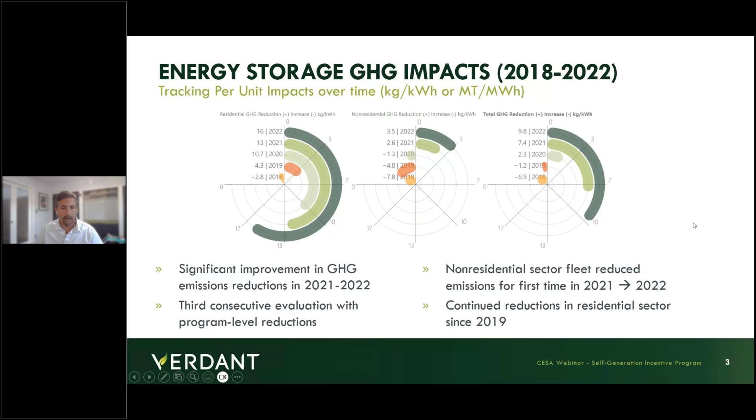I want to highlight this because of the timeline of the SGIP. It was developed and created in 2001 in response to the energy crises in California. Initially, as the name suggests, it was a self-generation program—incentives for behind-the-meter, early rooftop solar in California, fuel cells, wind turbines, IC engines. It wasn't until about a decade later that behind-the-meter energy storage became eligible as a technology.

The big important transition in the program was California Senate Bill 412, which modified the primary purpose of the SGIP from peak load reduction to GHG emission reductions. The program has seen many iterations since then—a decade of changing and refunding—where the budget went largely to storage, with incentive levels differing based on different budget categories.

Based on the evaluation results, energy storage was shown to be increasing emissions in the evaluation years 2017 and 2018. A GHG working group was established, and among other things, they created a digital GHG signal to give developers and manufacturers a better granular understanding of grid conditions, to see if batteries could be utilized more effectively to reduce GHG. There was also decision language that included compliance and operational requirements addressing GHG impacts. And here we are today.

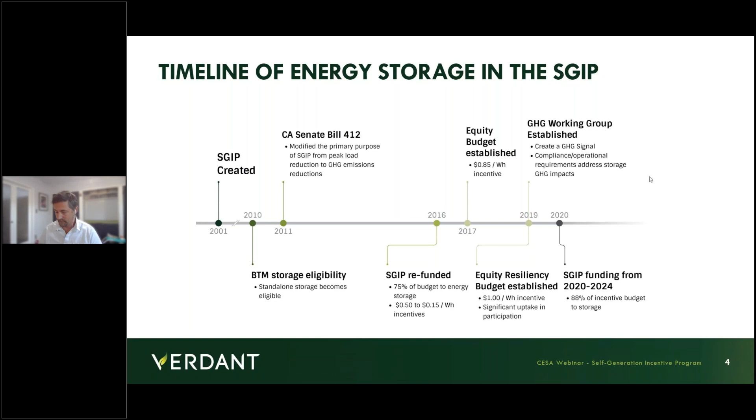Just to frame the scale of the program: as of the end of 2022, when that most recent evaluation was published, the SGIP was composed of about 37,000 systems paid over time, from the first system paid its incentive in 2012 through the end of 2022, representing about 1,300 megawatt hours of capacity.

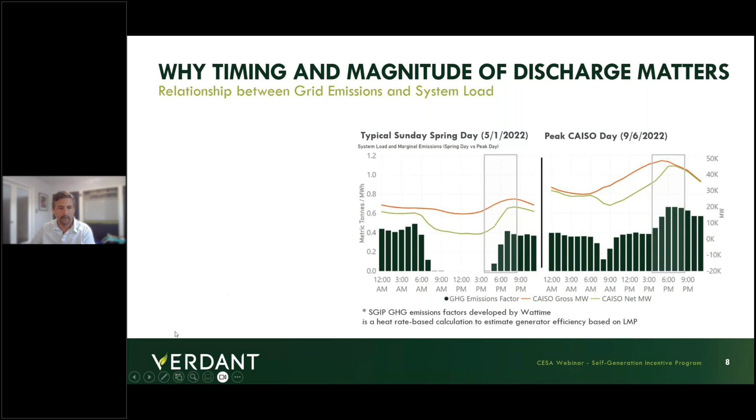Just a quick brief discussion about evaluation approaches. There's a lot of metrics that we develop that are very specific to the battery telemetry.

Efficiencies and utilization: you can sum the total discharge of a system over a given period of time, divided by the total charge of the system, discharge over charge, and get a round-trip efficiency of a system, similarly with cycles and capacity factors.

There are some metrics that we develop that are based on consumption at the meter in the absence of the SGIP technology. So we're utilizing AMI data from a customer prior to the installation of the energy storage system, looking at an unobservable counterfactual to measure the impact of the program intervention.

That graph on the right depicts what we do: the black line represents the metered load that the utility would see, delivered and received load, and then we back out the impact of the storage system to show what that load would have looked like in the absence of the storage. From a GHG perspective, systems could provide emission reductions relative to that counterfactual if emissions avoided during discharge are greater than emission increases during charging.

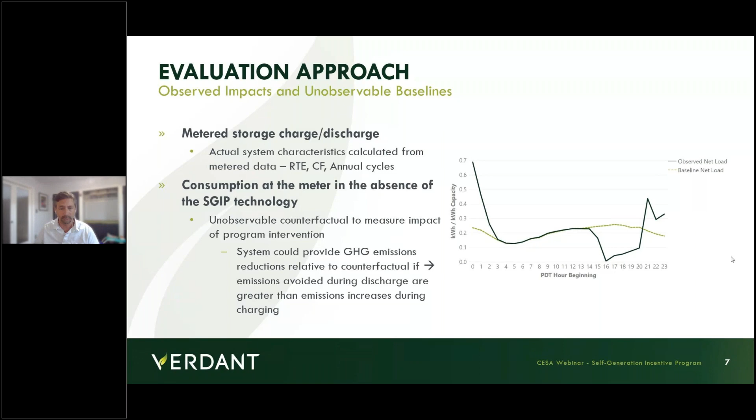This takes out the storage and looks at what's going on at the grid scale. Here we have two typical days: a Sunday spring day in 2022, and the peak CAISO day, the peak system load, on September 6th of 2022, on the right.

You see a couple things here. I'm showing the shape of the CAISO load, both the gross load, and then the green line is the CAISO net load, which is the load minus contributions from renewables on both of those days. You see that there's greater magnitude of system load on peak days.

You also see during some of those spring days where there's ample grid scale bulk PV generating, some of those high intensive demands like AC are not being utilized like they are in summertime from behind-the-meter end use customers.

You see periods where marginal emissions, these black bars, are zero, meaning that the marginal generator unit is a grid scale PV. On the peak day, you don't see the same thing.

Marginal emissions never go to zero, but they certainly are lower in the morning before the ramp during the afternoon and early evening. I've also boxed off the 4 to 9 on-peak period, which is the on-peak period here in California, to highlight what's going on the grid in terms of the maximum megawatts of generation relative to the marginal emissions of those generators.

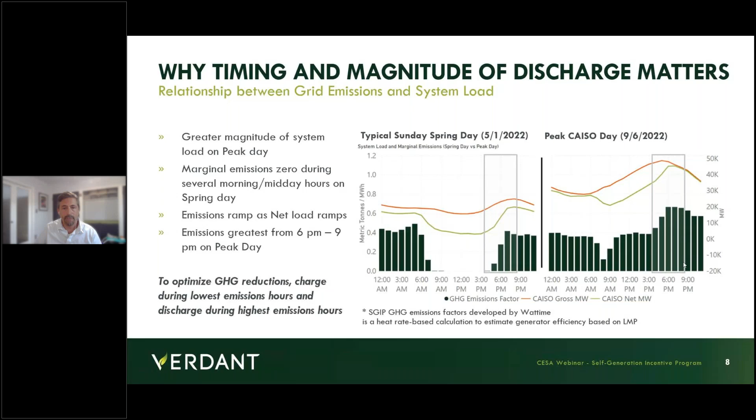Just a quick note on the characteristics. I have an appendix here also with the non-res storage dispatch behavior, but in the program of 37,000 systems, 97% of the residential storage fleet is paired with solar PV, with 3% standalone systems.

Almost invariably, residential storage systems are charging from early morning on-site PV. They're discharging in 4 different categories: self-consumption, which is charging from solar and then discharging the battery to zero out imported load throughout the day.

Time use arbitrage without export is very similar to self-consumption, except that zeroing out imported load is really just dedicated to the on-peak period. So if the customer has a 4 to 9 on-peak in their bill, the battery is just discharging exclusively during that 4 to 9 period and remaining idle thereafter.

We see time use arbitrage with export. Some systems are doing this regularly, discharging 40, 50 or 60% of the battery during strategic peak hours. And then some systems that are doing arbitrage without export normally, but discharging to export during specific events.

Demand response events, particularly like the Emergency Load Reduction Program, ELRP, or programs like that. And then we have a very small cohort of underutilized or backup systems. These are not allowed in the SGIP. Utilization is an important metric and requirement for the program, but we do see it every so often, and I'll get into what the impacts of that are.

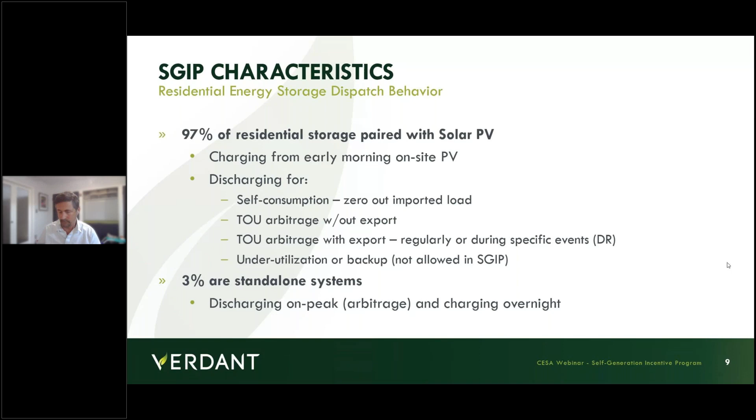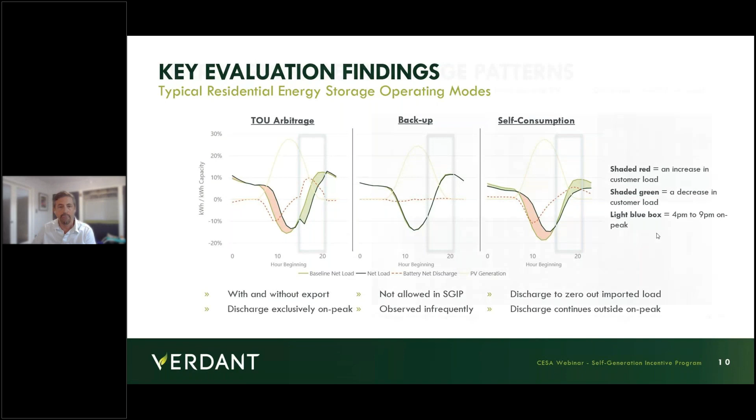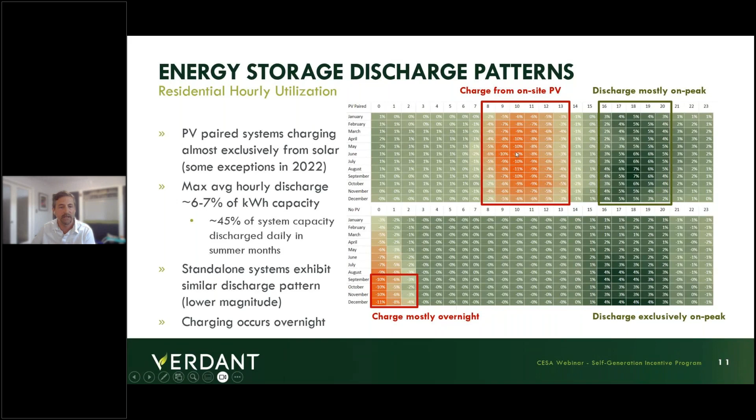You can see right away with arbitrage that there is more grid scale bulk PV generation during the day, obviously when the sun is plentiful. The same is true for rooftop solar behind the meter. So batteries are charging during PV generating hours, coincident with grid scale PV generating, where there's lower marginal emissions. Then during the evening, during that on-peak time, batteries are discharging, which is coincident with higher GHG as PV—grid scale PV—wanes and more traditional fossil fuel burning generators come online.

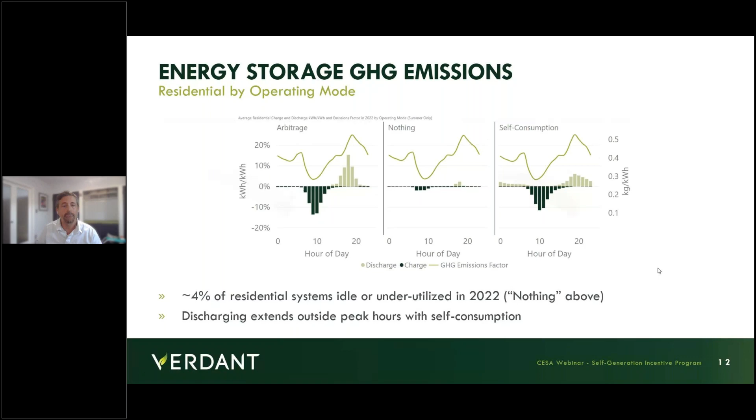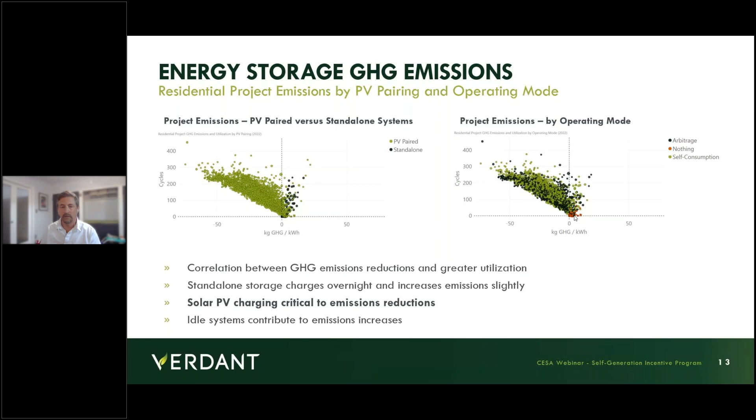Over here on the right are those different use cases: arbitrage versus nothing versus self-consumption. You see that arbitrage and self-consumption both lead to reductions in greenhouse gas emissions, while nothing—basically a battery idle—is contributing very slightly to GHG emission increases, because the battery is idle, it's got parasitic loads, and if it's being underutilized, there's also energy losses from the AC/DC power conversion.

Now, taking a step back—it looks like the program is doing a good job of reducing emissions, but is there any value being left on the table currently? So what we want to do is compare actual dispatch to optimal dispatch using the WattTime GHG emission signal. And optimal dispatch suggests that yes, there is more value that can be extracted from these systems.

We found an average of about 17 kilograms per kWh capacity of observed GHG reduction in 2022. That was an average across the whole residential fleet. When we had batteries follow the GHG marginal emission signal, we found a 3x improvement in GHG emissions when you optimize for it.

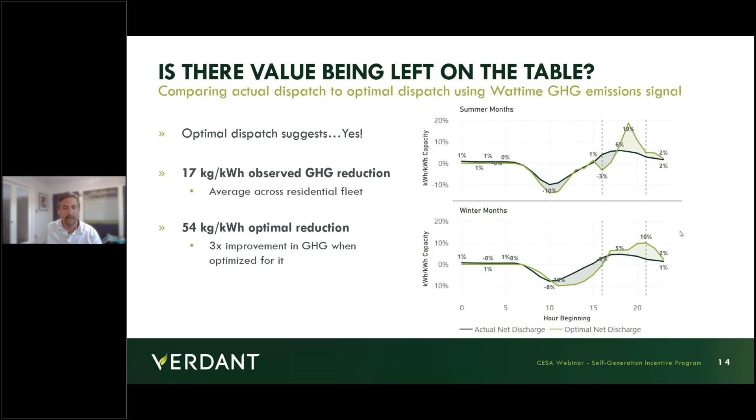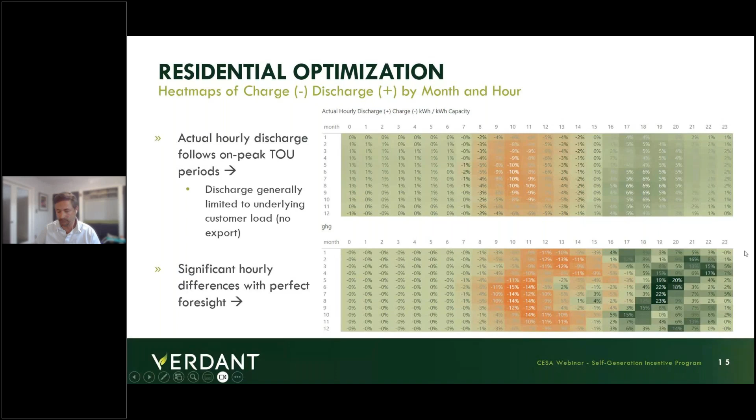So in conclusion, SGIP behind-the-meter energy storage technologies are providing GHG emission reductions. There's a lot of reasons for that. Minimum cycling requirements are great. One of the program requirements to sort of have minimal utilization is certainly driving that. Higher differential: the SGIP requires customers to be on higher differential on-peak, off-peak time-of-use rates. That helps guide some of the behavior. And number 3, which is the battery operating mode.

So someone who's doing time-of-use arbitrage, the return on investment, the payback period, all become much more attractive when you're looking at a higher price differential time-of-use rate. And I will note here too, this is 2022, so these are all NEM customers, net energy metering. There's no net billing tariff customers in this cohort or in the program at this time. And also demand response participation certainly helps with GHG emission reductions during some of those really critical emergency hours. And then access to that digital GHG signal is guiding that behavior.

However, residential and non-res systems are not discharging the total capacity of the system regularly. Many res customers are limiting their discharge just to maintain that net zero load rather than exporting. So some program improvements to encourage additional battery utilization include increasing cycling minimums to better capture actual behavior, enrollment in virtual power plants where an aggregator can control a fleet of systems, or utility-controlled storage. We see models of that here in the States that have success. Participation in real-time rates, where there's more granular rates than just the 4 to 9 on-peak period.

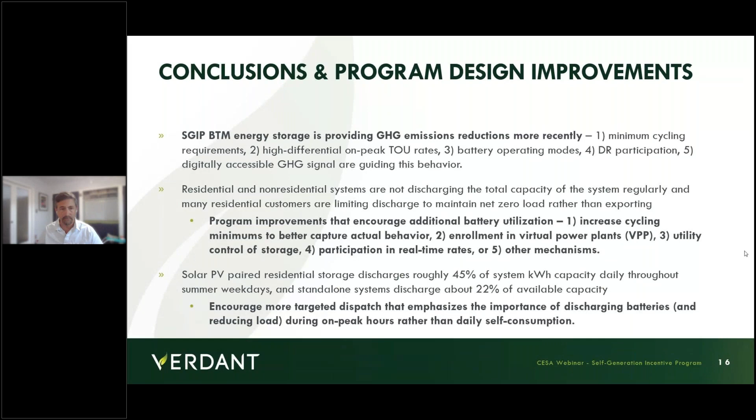And then behind-the-meter storage paired with on-site PV. Obviously, when you're charging from early on-site PV generation, that's clean electrons being discharged. And if you're exporting to the grid, those are clean electrons, clean energy being exported. And charging also occurs coincident to those lower grid-scale emission hours. So when you're charging the battery, that's when the grid would rather you absorb some of that load rather than exporting or discharging.

And then GHG emission differentials between charging overnight and discharging on peak are not sufficient, particularly in the summertime, to realize emission reductions for standalone systems like we see observed with PV-paired systems charging from on-site PV. So standalone systems perhaps could achieve reductions with the appropriate signal, perhaps the GHG signal or some kind of real-time pricing signal.

And then finally, the optimization modeling reveals that average actual avoided emissions of 17 kilograms of GHG per kilowatt hour of capacity would triple if you can optimize for reduction. So, creating more ambitious GHG reduction targets, having more granular signals that developers, manufacturers, host customers, utilities and aggregators can get their hands on to extract more value from these DERs would certainly be beneficial moving forward. And with that, I will hand it back over to the panel.

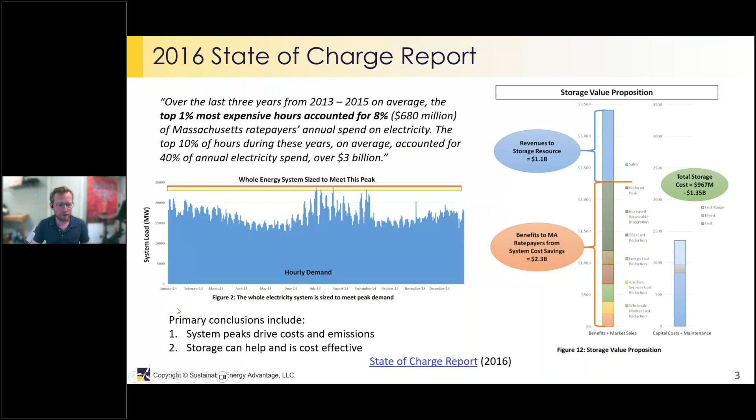Let's see if I can get to the next slide here. Yes. You saw that reflected in the statute that followed. So 2018, the enabling legislation passes. The statute itself is very thin. It doesn't specify whether emissions are the goal or whether peak load reduction is the goal. But in the announcements, in the discussion, there is very much an emphasis on getting storage developed, reducing peak demands, and emissions are sort of also in there. The policy goes into effect in 2020.

And if we look at it from DOER's perspective, based on the straw proposal that they released when they were developing the regulations, there were an array of different goals for this policy: flatten the net electric load curve, reduce system costs, encourage storage deployment, and yes, of course, also reduce emissions. All of these things we will all understand are very much related, but if you were to design a policy for instance just reducing system costs versus just reducing emissions, you would end up with different policies.

So what is CPS? It is like a renewable portfolio standard in that it is a market-based, certificate-based policy that places an obligation on load-serving entities to procure a certain number of certificates. But that is where many of the similarities end. There are a lot of other complications, interesting things that make it CPS and not just your typical RPS.

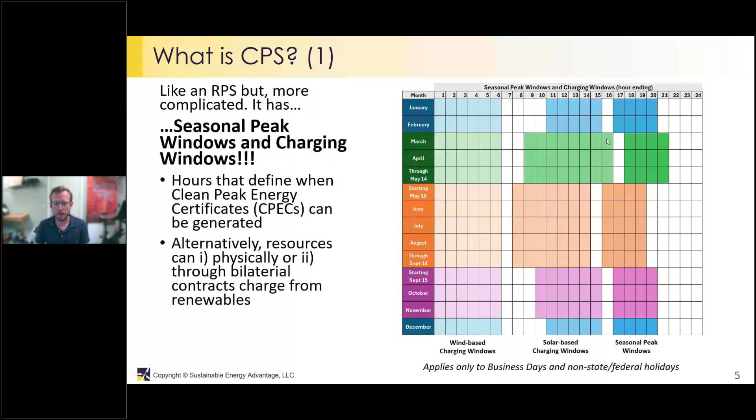Other components of the policy I'm going to go through more quickly. CPS has multipliers. The thing that I want to highlight here is that you can generate more certificates during the summer and the winter, 4 times more certificates specifically, because those are when ISO New England tends to have the highest peaks. It is not necessarily when there's the greatest emissions reduction potential.

Similarly, there's an additional multiplier associated with output, discharge, or load curtailment, depending on what type of resource you are, during the monthly peak hour. You can generate 25 times as many certificates during that monthly peak hour. That peak hour and that magnitude of benefit is very clearly targeted at cost reductions, because that can produce cost reductions from a capacity perspective, and also from the way that transmission costs in New England are allocated. By reducing load during those hours, there are opportunities to impact those system costs.

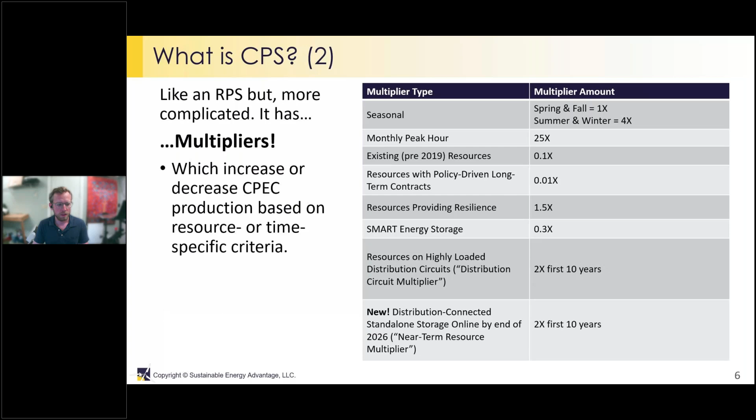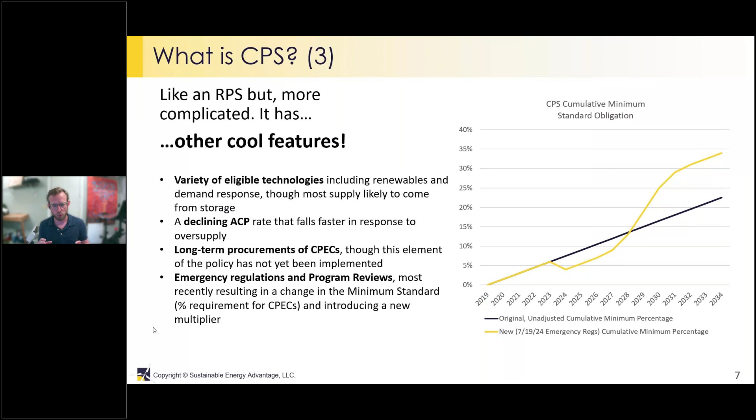There are a number of other critical elements of the policy that I'm not going to talk about, except to mention briefly that CPS is also different from SMART in that it has a different set of eligible resources. In addition to behind-the-meter storage, front-of-the-meter storage, both distribution and transmission connected, is eligible. Load curtailment, demand response, EV demand response, all sorts of technologies, and also certain renewables are all eligible, which again make the policy dynamic, interesting, complicated. But for today, I'm going to focus on the emissions impact specifically of storage participating in the policy.

This is going to change a little bit based on emergency regulations that were promulgated about a week and a half ago at this point, which reduced the demand to try to allow supply and demand to reach balance a little bit more quickly. But for now, certainly the market is very undersupplied.

So the question, is CPS reducing emissions? The short answer is probably not much yet. In answering this question, I'm going to reference a couple of studies that have been performed on the topic. I'm going to show a little bit of original analysis a little bit later on, but we don't have access to the same amount of data, the same type of data that Verdant does. So a lot of this is going to be based on modeled likely behavior of storage and not necessarily observed

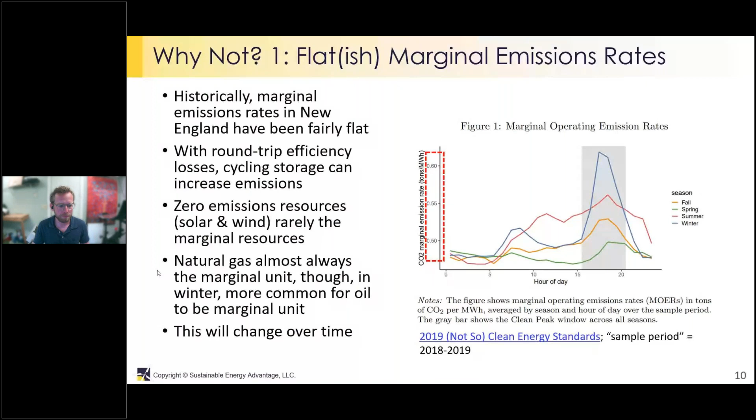All right, I'm going to see if I can advance this slide without screwing things up.

Okay. So that's the first reason that CPS is not delivering emissions reductions, just the nature of the New England system. The second reason is the design of CPS itself. So CPS is designed, as I showed before, with these fixed windows during which these certificates can be generated. That means that resources will discharge during those hours in order to generate these certificates. The good thing about having those fixed hours is that it's easy for participants in the market to understand what it is they need to do to generate these certificates. The problem with using that fixed window approach is that peak emissions or even just peak demand will not always fall within a 4-hour window.

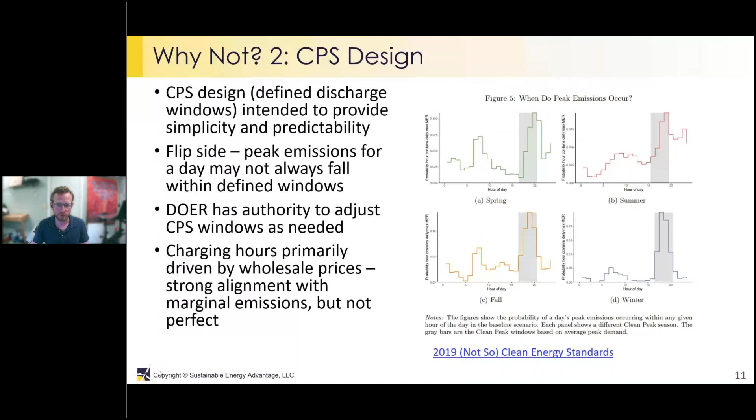So you have a critical component of the policy design, again, some simplicity in understanding how to generate the certificates, working against the ability to actually achieve short-term emissions reductions. So is this going to change over time? Short answer is yes. As we see more renewables, they will increasingly become the marginal resource, which will provide this opportunity

for greater emissions arbitrage. Interestingly, the changes that we expect in New England will push average emissions down more quickly than it's going to change the pattern of marginal emissions over the course of the day, which is to say that achieving the type of immediate emissions reductions based on marginal emissions rates that California is seeing is actually probably going to take a good number more years in New England for us to start realizing.

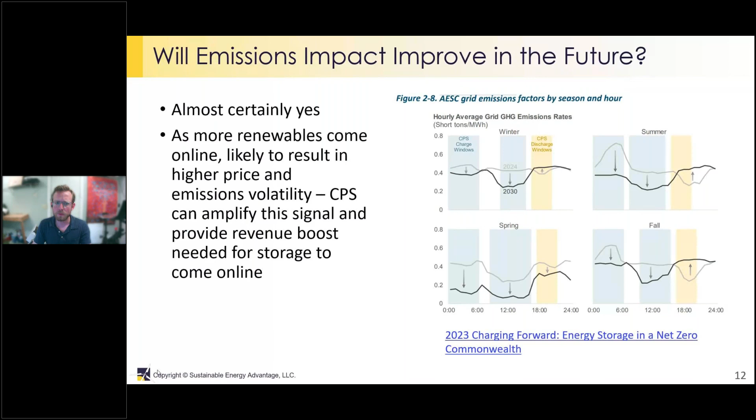But short-term marginal emissions are one factor. They are one way of measuring the emissions impact of a policy like this. I'm not going to get into a lot of detail on this, but we also looked at a different metric. So NREL, through its Cambium data sets, calculates what they call a long-run marginal emissions rate.

The idea here is instead of just looking at the marginal unit and the emissions impact associated with changes in demand, they actually look at the ability for the entire system over time to change in response to changes in supply and demand potentially associated with something like the operation of storage. So those more systemic changes could include generator retirements, new generators coming online, transmission investments, those sorts of things.

So when we used the NREL long-run marginal emissions rate, resources that we modeled would actually start generating emissions reductions today. So in some ways, it is a question of metrics and what your planning horizon is. And that's really where I just wanted to leave today. Focusing exclusively on short-run marginal emissions is a valid approach.

Focusing on encouraging the establishment of a storage industry that we know will be required to meet clean energy and greenhouse gas mandates is another reasonable metric. And again, that would result in slightly different policies. Also, focusing on cost reductions could be a reasonable metric. Electrification is not compatible with extremely high electricity costs.

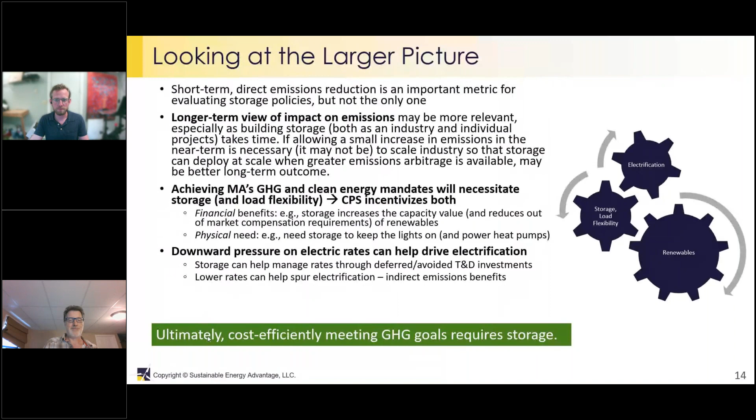So I understand that part of the structure of this thing is that there are designated hours for discharging and charging, and if you hit those, you generate the credit, even if it doesn't necessarily align in that particular instance with the peak emissions hour. Is there a signal in ISO New England similar to the one that's being used in California that could be used to better optimize that battery response?

The short answer is no. So WattTime provides that real-time marginal emissions signal, as I understand it. Brian will correct me if I'm wrong on that, but there's not a corollary in New England. As I mentioned briefly, in a slide that got cut because I always go long, I showed based on retrospective analyses that tried to establish that marginal emissions rate, that there is a really strong correlation between price, wholesale energy price, and emissions. So one can use that as a proxy, even though it is not exactly emissions rate, since that signal does not exist in New England.